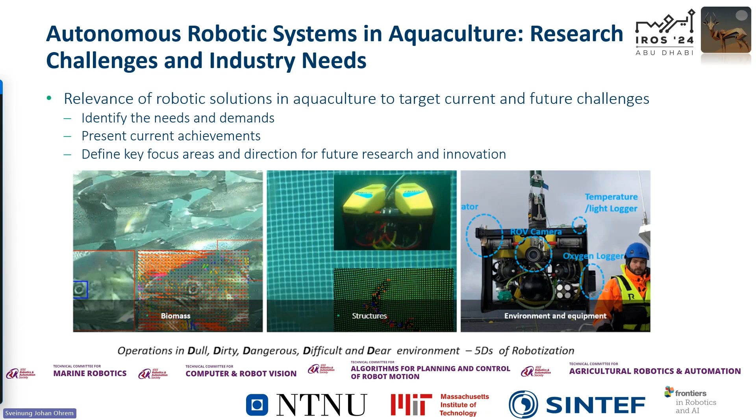Welcome everybody, we are organizing at IROS the first aquaculture-dedicated robotics workshop. The goal of this workshop is to bring together industry and academia, understand the challenges the industry is facing, see what kind of solutions we have so far, and then inspire the community to bring new solutions.

We have a big program. It's only a few hours, but intensive. So two sessions, two panel discussions. We have several spotlight presentations. And at the end, we will hopefully discuss the remarks of this workshop. The invited speakers in the first session are four people, and they will give the industry perspective and the challenges from the authorities in general.

In the second session, we have people working in research who have developed solutions in aquaculture. Two sessions, each with spotlight presentations and dedicated poster sessions during the breaks, discussing relevant results in aquaculture. In the panel discussion, all invited speakers will take part; we will not have questions during each invited presentation, but we will have all the questions during the panel discussion.

This is the organizing committee, and I would like to welcome you all on behalf of the organizing committee. We have support from four technical committees for this workshop, there will be three awards, as we will see later, and we have also launched a special issue in Frontiers in Robotics and AI.

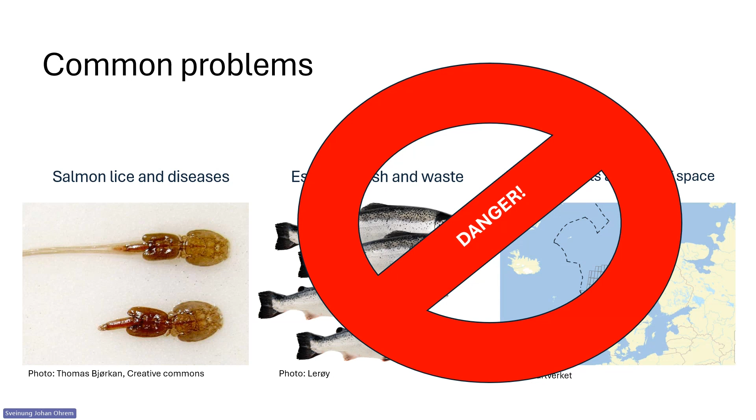In addition, I would say, or I hope, that some of the motivation for the technology development is that it's a very dangerous occupation. It's actually the second most dangerous occupation in Norway. So some of the technology development perhaps is to create a safer working place.

But other safety challenges could have easily been taken away if we had more creative organizations. Because we have the safety challenges coming with that we often need to perform operations hastily and with few people, perhaps having long hours and few breaks, leading to injuries and strains in manual operations and in stressful work that actually didn't have to be that stressful. So that will perhaps also be one reason to make more technology or automatize the operations.

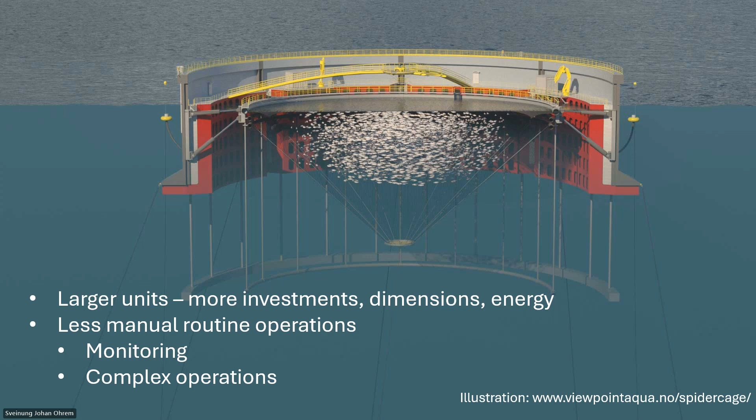So when we have been talking with people working at these kinds of concepts, in some of the ones that are up and running, or developing the ones that haven't been started yet, we can see that some of the challenges will be related both to what we call in safety research the sharp end, in the operations, but also in the offices. So you will have less manual routine operations, which increases the monitoring operations and also gives more complex operations out on the net pen construction. I will say a little bit more about that.

So the concepts do give more predictable daily tasks in control rooms. This is not directly dangerous, but it's still challenging for the health of the personnel. It's monotonous, staring at screens 24/7. It also requires experts in both fish biology and farming and practical things. And I'm not sure if those experts will want to have a control room working place. So it's challenging both ergonomically and psychosocially. Also, that could lead to strains, and it could lead to difficulties with recruitment.

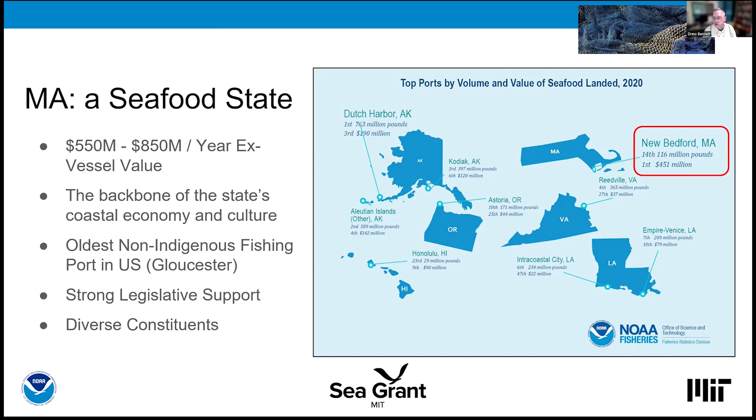For monitoring, we have an autonomous sailboat program. We have an autonomous profiler, which I will talk to you about in just a moment. We also look at other issues like eelgrass aquaculture co-location, which is legislated in the state. And we have a project in disaster preparedness for oil spills in aquaculture. What happens in the event of a calamity? What do we do to protect the aquaculture industry?

All of this is driven by our strategic plan. The National Sea Grant Program has strategic goals they want met, and our plan is designed to achieve those goals. In particular, in this case, number 3, developing technologies that will be transferred to the coastal resource industries so they can employ technologies and reinforce strategies to ensure safe and sustainable seafood and products. So the whole point is to get this out there in the hands of our communities of stakeholders.

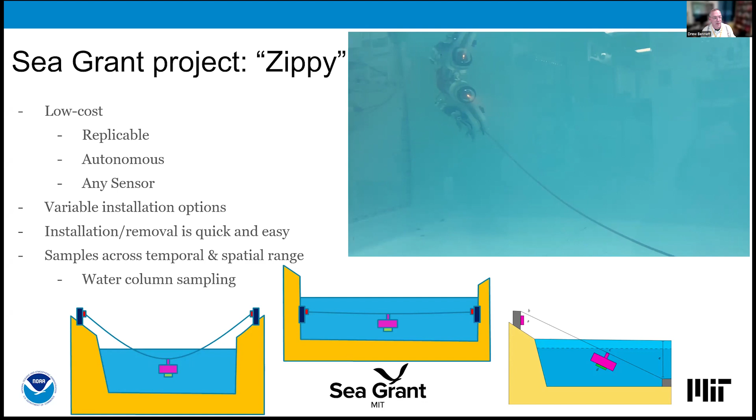You can have it mounted as originally intended with one end in the ocean and one end on shore. And now Zippy runs in and out regardless of the tide, regardless of the waves, regardless of the weather, and will collect data for you. So lots of installation options. Installation and removal is quick and easy. There are some fasteners on the side. You can clamp it to the cable and turn it loose. And it will happily collect anything you want to know about the water column.

So what are we going to do now? Zippy proved out that it can work, but it had a few issues. So we built a new Zippy. This time, instead of using polymer, we used all stainless steel and aluminum. It is much tougher. The clamping force on the cable is much greater. We don't have slip issues like we did before. We can carry a significantly larger load, so we can now carry multiple sampling bottles if necessary.

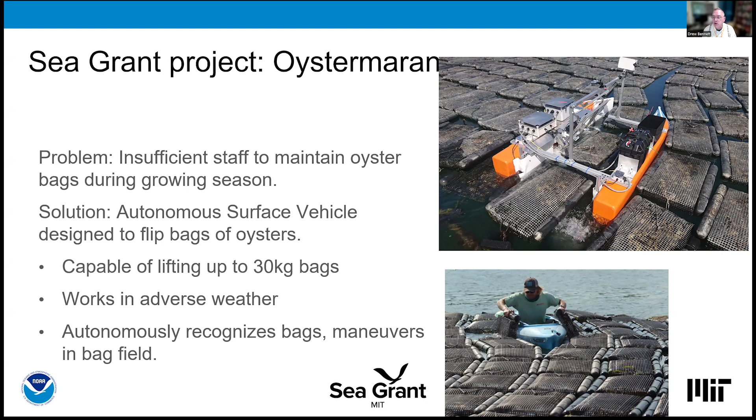Also, you have to do it in all weather, which tends to not be great fun for the aquafarm employees. So we built Oystermaran. Oystermaran's job is to flip the baskets autonomously. We have it autonomously recognizing bags, recognizing fields of bags, and maneuvering into the bag field to flip the bags. So we've now worked on to Gen 2. Our Gen 1 robot was a great learning lesson. We gave it some thrusters, we gave it a flipping mechanism.

Some of the things we discovered was the baskets, when they're being forced by tidal flow, press together, they press against the boat. So we needed to give the boat the ability to wiggle itself free, to struggle, if you will, and get free of the baskets. So we gave it additional thrusters in the bow. We also improved the autonomous basket recognition. Early on, we were using fiducials. Now we don't need that. We'll just know a basket when we see one.

And we've changed out the flipping mechanism. The first one worked okay, but it didn't shake the basket. After you flip the basket, the oysters tend to all roll to one side. So you've got to actually give it a bit of a shake to level out the oysters, which is better for the oysters for their growth rate.

Besides adding the lateral thrusters originally to wiggle the boat, we discovered that the thrusters also work really well to kind of push the baskets apart to ease the maneuvering. So we were kind of happy about that. And in general, it's working really well. And you see our latest generation in the bottom right. This was an early field test, and we're going out for an extended deployment this fall.

And that's all I've got right now. We're working on other projects involving upwellers and similar systems. More autonomy in the oyster seed industry, but we don't really have a lot to show yet, so I hope to have more for you another time.

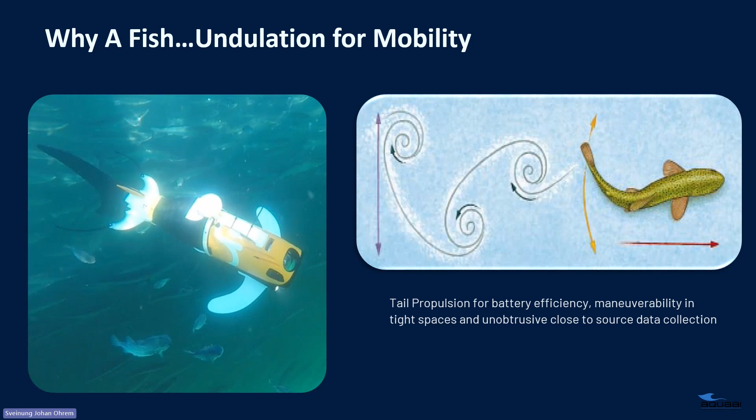Just to get back a little bit more onto the technology, because it is IROS, right? The vehicle carries a payload of up to 16 different sensors. The usual payload in aquaculture is salinity, dissolved oxygen, temperature, depth, pH, of course. But we also have the option to put other systems; it's plug and play, built modular like Lego. It has 3 cameras on board, including a belly cam, and a side scanner to do net inspections. And the other beautiful thing about having a biomimetic autonomous system in aquaculture is that you can go to different depths. So let's say you need a reading at 3 or 6 or 9 meters.

You can go to all those depths and you don't have to take your static camera up and down or sensors up and down. The robot just goes up and down on its own and it relays the information. In terms of the battery power, ideally you can swim up to 8 hours. You recharge usually every 4 to keep going. And again, it inductive charges, stays in the water up to, we had the ones in Norway were there about 10 months at a time and we took them out and we can go longer.

So even now, when we talk about the technology, obviously different waters here, it's much more salinity. So it probably won't last a whole year in the waters here. But the idea is to really make an ease of use system that stays in the water and does the job of monitoring 24/7.

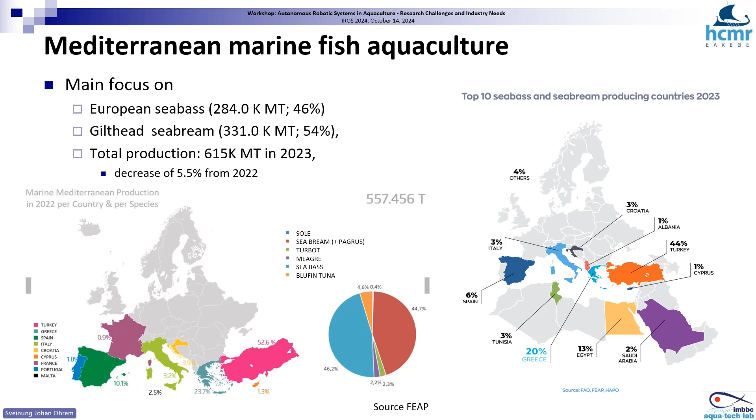And if we dig a little bit more into the data, then we see that there are more countries involved, and not only more countries, but also more species. So if we want to have an overview of the characteristics of the sector, we can say that the Mediterranean sector is characterized by species variety, which makes a huge difference from Norway or Chile. And these species have different feeding requirements, different behaviors, different tolerance limits to temperature, different disease resistance, and so many other differences that make the situation a lot more complicated.

But the majority of the species are found in sea cages, the major ones at least: the bass, the bream, the meagre, the pagrus. And also in the Mediterranean, we have tuna farming, which is a completely different story, and I'm not going to refer to it at all because it's a different farming operation from the beginning to the end.

And in the sea cages, most of the husbandry relies heavily on manual labor. And in the Mediterranean, we have small farms, and this is a clear indication of the fragmentation of the sector. And also we have a very varying regulatory framework, in the sense that we have at least 12 countries involved, 3 of them outside the European Union. Therefore, it's quite difficult to employ universally applied methods. We cannot transfer directly what's happening in other parts of the world. And it's very hard to create one-species-fits-all algorithms.

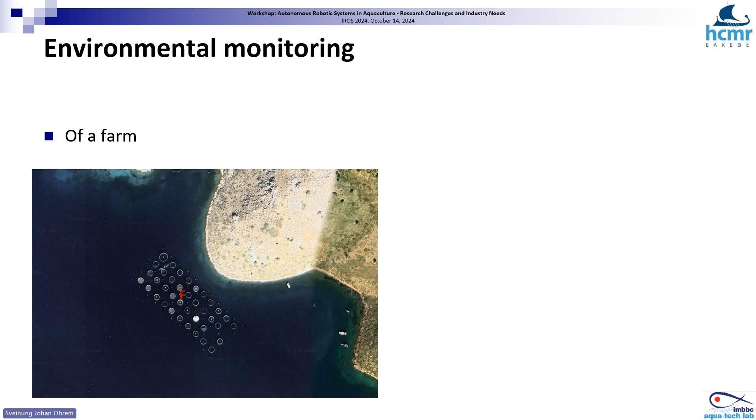But it's getting more and more important to monitor several farms, wider areas. Here, for example, in this picture that I'm showing you, there are 7 farms co-located in quite a close area. So we need to understand the interactions and how the environment is affecting not only one farm, but all around. And for this, we need a different approach: not only sensors, but different types of data, like satellite images.

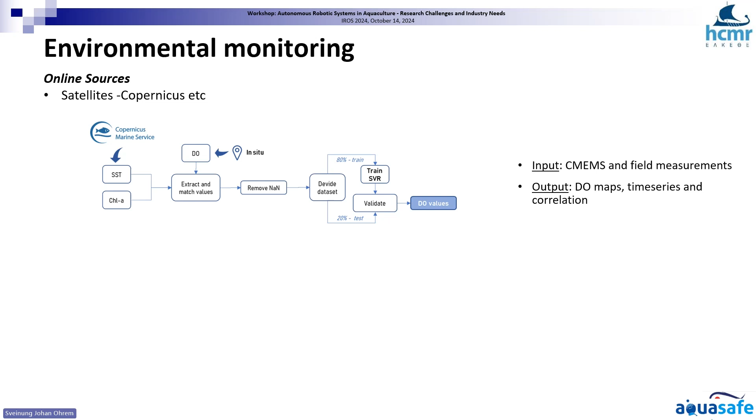And in the European Union, we have the Copernicus system, which gives us this possibility. They provide us with data that allow us to monitor wider areas. And in this example that I'm showing you here, we have the information for the temperature and the chlorophyll, which is the presence of phytoplankton, nanoparticles in the water. And then with an algorithm, we have been able to estimate the oxygen concentration in wider areas, and this gives us the chance to have a better overview of what's going on in a wider farm.

Of course, there is a web-based platform always there, where we collect the data, and with the help of biological models that provide us with information about the requirements of the species in the future, in 1 week, let's say, for the oxygen demand, for example, we are able to monitor better the farm and also to apply improved husbandry practices, and the farmers can really manage their farm in a better way.

Feeding control. Why is this important? We all know feed represents one of the biggest parts of the operational cost in the farm. We know that it's a multi-parametric problem. It depends on the environment, the physiology of the species, and also the behavior. And this is where we have been concentrating recently, wanting to answer some questions like how fish behave during feeding, and if we can understand when the fish are satiated, when we can stop feeding, how we can control feeding in a better way.

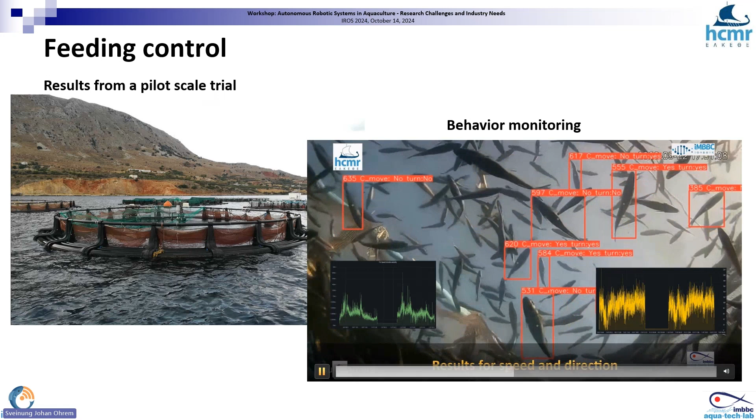So we use cameras, static cameras, but we hope that we are going to use something different in the future. And we have a pilot farm where we are able to do trials, and you see how the fish behave. We are able to track and detect the fish and take some information about their speed and their direction. And also we are able to monitor the specific activities that the fish have during feeding. And you see that the sea bass, for example, has this strange, high dense activity when they are fed, which is completely different than with other species. So we have to develop similar algorithms for all the species that we are interested in.

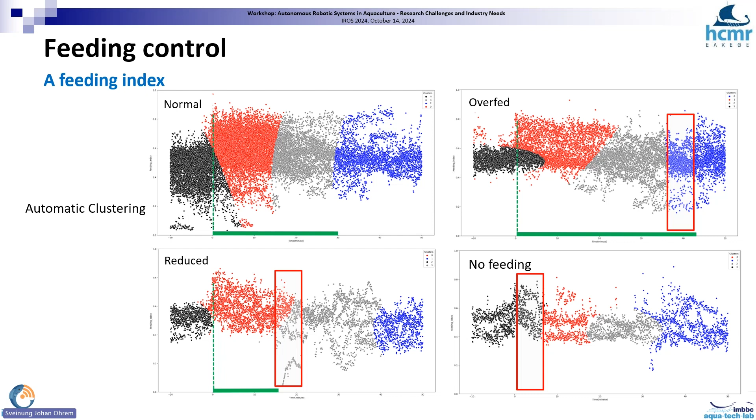And I invite you to check also the poster session when my colleague Dimitra Georgopoulou will make a presentation on this. And there is also a poster where we can discuss in more detail how this came up.

Now, apart from feeding, of particular interest is the monitoring of the fish in terms of their size and also their welfare. And there are some operational welfare indicators that have been defined based on external characteristics of the fish. So we use, in this particular case, a stereoscopic camera, where we define several morphometric characters on the fish. And then we are able to see not only the size of the individuals, but also the presence or not of external changes in their body, like color changes, lesions, fin erosions, and so on. And we have a quite good idea of the actual situation of our stock.

Finally, I'm going to speak a little bit about cage net inspection, something that we are going to hear much more about later on. I don't need to say that this is a manual operation now, and why it is important to have an autonomous vehicle to do this operation.

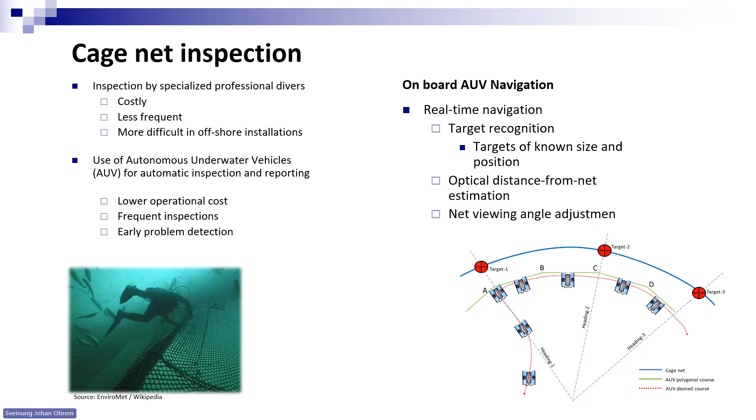So, some years ago, we have been working in this direction and trying to have real-time navigation with target recognition. We used a small robot, and you see how we have been testing it in our cages with several thousand individuals of bream, and we successfully made the robot complete the navigation and monitor the fish while having on board also particular algorithms that were able to monitor the integrity of the net and whether or not there are holes or other disturbances in there.

Speaking about cage net inspection, I would like to mention two more much more recent projects. One is the Kalypso autonomous underwater vehicle that came from a Greek group from the University of Aegean that have developed from scratch a new AUV, and they have also attached an arm on it in order to make some manipulation. And also the HEKTOR project that we are going to hear much more about later today in the next session, that came from the Croatian group.

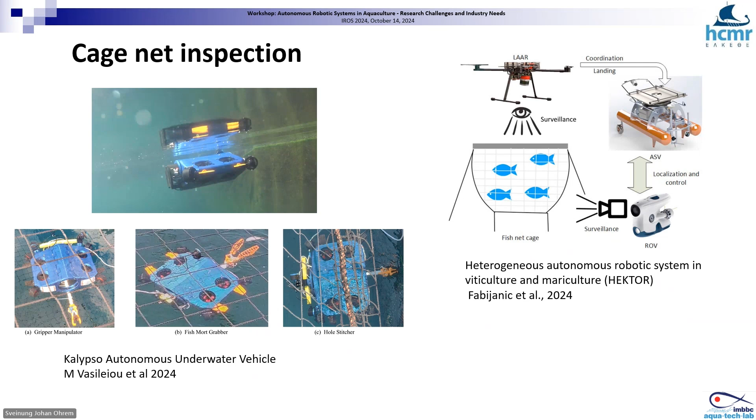And to close this summary of what's going on in the Mediterranean, I'm going to show you some of the future challenges of the sector. I'm going to start with climate change because this is of particular importance, because it affects all the production chain of the industry: the fish, the infrastructure, the personnel, everybody. So we have to focus on this. We need to find new farming areas, and the sector should decide whether or not they're going to move a little bit offshore or invest in RAS.

And it's obvious that we have to take care of the sustainability of the sector in terms of environmental, social and economic sustainability. If I have to give some lines of where to look, I would say that we need data of various forms to perform predictive modeling and to develop digital tools that are very important and essential for the sector. To apply the principles of precision fish farming, because this is going to absolutely transform the farming operation, not only in terms of improved decision making, but also operational efficiency.

And if I'm allowed to provide some requirements from the sector, I would say that the use of autonomous vehicles for inspection and repairing of the nets is of particular importance. Also, before closing, I would like to give some attention to skills and capacity building, because it's important how this technology will pass to the sector, and we need to acquire knowledge with new approaches, with a multidisciplinary and transdisciplinary approach, and with novel mechanisms.

Okay, the preamble for this research is to help the ROVs in better detecting the defects in aquaculture net pens. The idea is the aquaculture net pens have different defects such as holes or debris, which can lead to loss of fish and loss of fortune. For that, previously we used to have divers who used to go there. Nowadays, because of increased safety and efficiency, we introduce ROVs over there. So the ROVs go there and detect different defects in the net using computer vision algorithms.

So our idea is to add a layer of autonomy to this detection process by introducing a gradient estimation, which would help the robot to adjust its position with respect to the net. So this is the architecture, the main idea of our research. So going from left to right, this is the net pen. The image is acquired by the ROV, and this gradient estimator is at the heart of our research.

The gradient estimator first extracts the gradient of the net from the image. It then matches this using a pre-trained model, which has been trained with images that are good distance, close distance, or far distance. Based on that, the gradient estimator tells the controller on the ROV that either you are near, far, or at a good distance from the net. So based on that, the controller commands the ROV to either move close or far from the net.

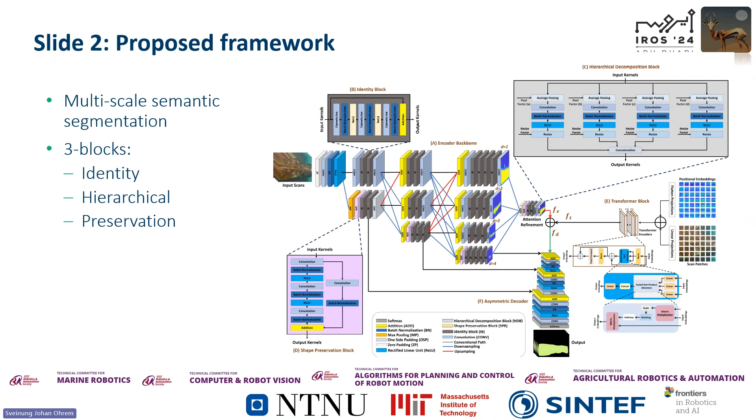So the proposed model, this is the architecture diagram of the proposed model, and it contains different layers, and these layers are identity, hierarchical, and preservations. So each layer performs their distinct activities, taking the input images and extracting the features based on the annotations of different classes.

So our results show some significant improvement over the current traditional computer vision models. And we have published this work in some reputed journals.

Hello, my name is Dimitris Voskakis, and I'm a research fellow at the Norwegian University of Science and Technology. As is well established, aquaculture plays a significant role on the global economic scale. It has experienced significant technology developments in fish biology and the production environment, and several novel studies aim to improve aquaculture practices and fish welfare.

Our objective with this project is to use a non-invasive system to assess stress response in salmon, to provide and enable a warning system that informs us about the state of the fish. Hence, we created a novel tank environment that can mimic the light conditions that exist on site. We implemented novel technologies there. And in a sentence, we can say that we are using the fish as sensors.

So as you can see here, we have developed an enhanced tank environment where we have used a submersible LED light that can homogeneously illuminate the tank, where the light scale is similar to daylight. We can adjust this light support frame to the desired depth, so we can illuminate the whole tank in a homogeneous way.

Also, we have installed a camouflage frame where all the instruments, the sensors, the water inlets and outlets are, let's say, hidden behind this camouflage wall. So we have a clean arena for the fish. And through that, we avoid fish collision and the potential impact of the presence of these external factors.

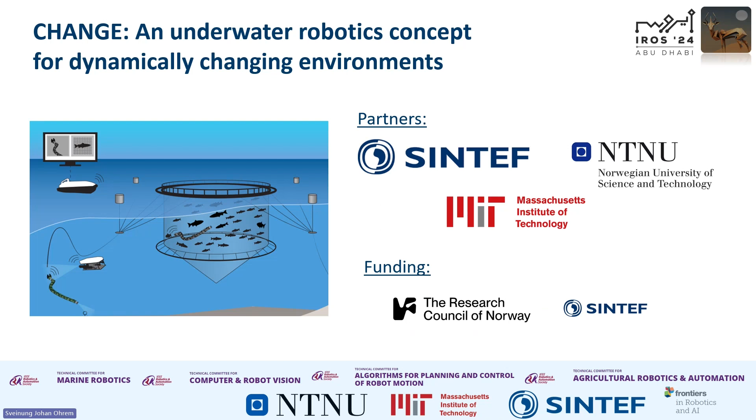So by now, we've heard many of the other presenters talk about how the aquaculture industry, especially in Norway, can be very challenging. It can be dangerous for the people involved because of weather conditions. And there's also a need to make it safer for the fish. And to do that, we can, of course, use technology. We can use robots. There are many solutions that already are here. We don't know enough about how this technology actually impacts the fish.

So we tried to do some experiments where we took a mid-size ROV and deployed it with sonars and a stereo camera. And then we did some movement tests that were very typical for both inspection and intervention operations. Put the thrusters on and off in high and low intensity, did some movements, and also did some turning movements to simulate an inspection.

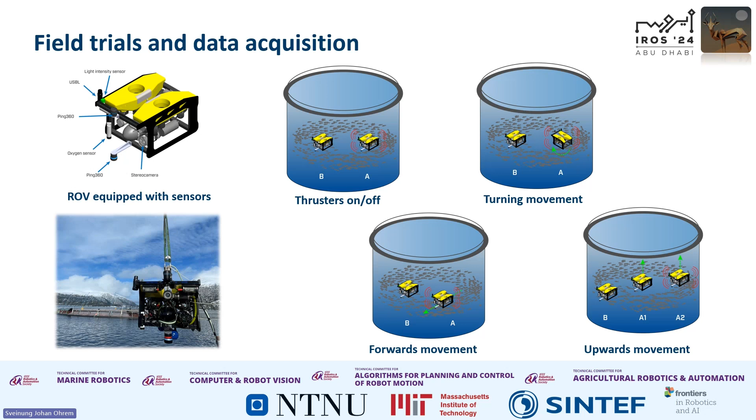And we use the same stereo vision video to do a qualitative blind study where a series of reviewers watch these 5-second random videos of fish and try to score the level of escape response. What we saw was that there were several cases where we got a strong reaction from the fish, especially during fast movements or high effect of the thrusters. And what we saw was that these 3 methods for analyzing the fish response to this technology gave similar results.

And what we know now is that we should use these methods to do further trials to have an even larger data set to say something about how fish react to the robot. Thank you.

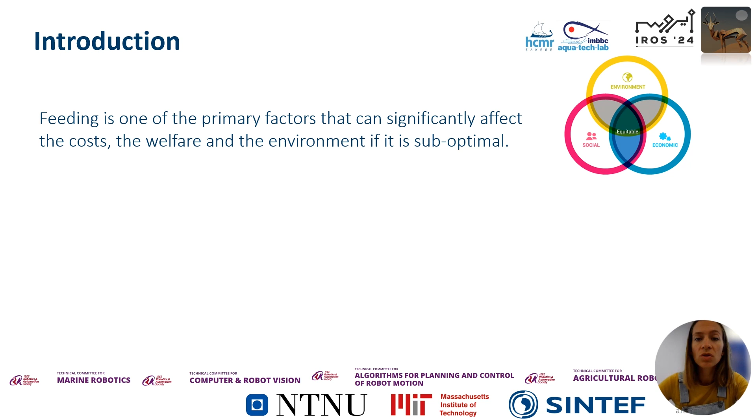Hello, I'm Dimitra Georgopoulou, and today I will present to you a tool we have developed for monitoring the fish behavior in marine cages. In aquaculture, feeding is one of the primary factors that can significantly affect the farm costs, the fish welfare, and the surrounding environment. For this reason, it is very important to prioritize and optimize feeding. We know from research that the satiation levels are tightly linked to specific behavioral responses in fish, and therefore we can optimize feeding by monitoring the behavior of the fish.

Here we had a double aim. First, to develop a tool that can constantly monitor the behavior of the fish in marine cages, and second, we wanted to identify indicators for detecting satiation levels in European seabass. For this, we planned an experiment where we fed the fish with different quantities, and during this period we were monitoring the changes in behavior using the submerged camera in our pilot scale farm.

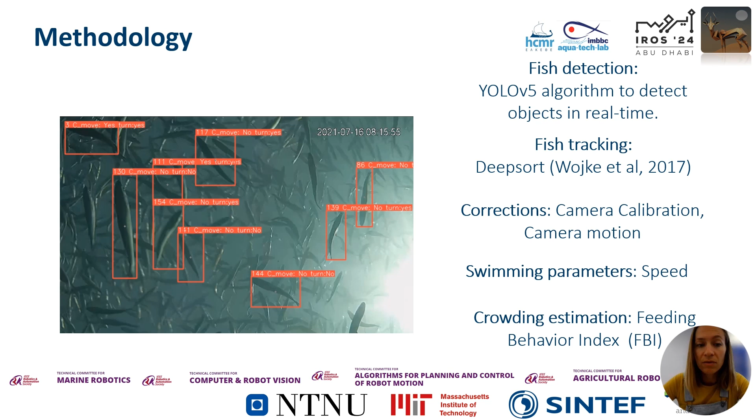We used well-developed tools such as YOLO and DeepSort for detecting and tracking the fish. We corrected the camera for camera distortions, and because we were in a very mobile environment in the sea, we corrected for camera motion. From there, we extracted one of the behavioral parameters tested, the speed, but also using other computer vision techniques, we extracted the feeding behavior index that can show us the crowding level of the group. From the analysis, I will present two basic results, one for each parameter.

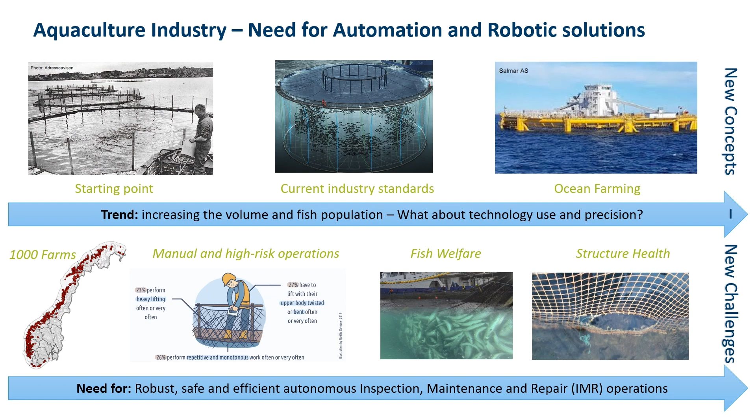Just the motivation: in Norway, the aquaculture industry is one of the biggest industries, and from the starting point in the 70s with these wooden structures towards the current industry standards with plastic floating structures, and the latest development licenses where new concepts have been developed and deployed, there has been increasing interest and increasing volume and fish population, but this has not been the same for adopting new technologies. Only in Norway, there are now about 1,000 farms around the coastline, and several of the operations are done manually, and there are risks associated with the personnel working in these facilities, fish welfare, preservation, and structural health. This indicates that there is a need for robust, safe, and efficient autonomous inspection, maintenance, and repair operations.

Currently, the practice in the majority of cases is that several service vessels with cranes and people on board perform several operations in fish farms on a daily basis. But there are several fundamental challenges to growth related to fish welfare, mortality, escapees, sea lice, and working conditions, and the industry needs new solutions. Therefore, the Norwegian government lately has asked the fish farmers to propose new solutions in order to target some of these challenges, as mentioned earlier by Christina.

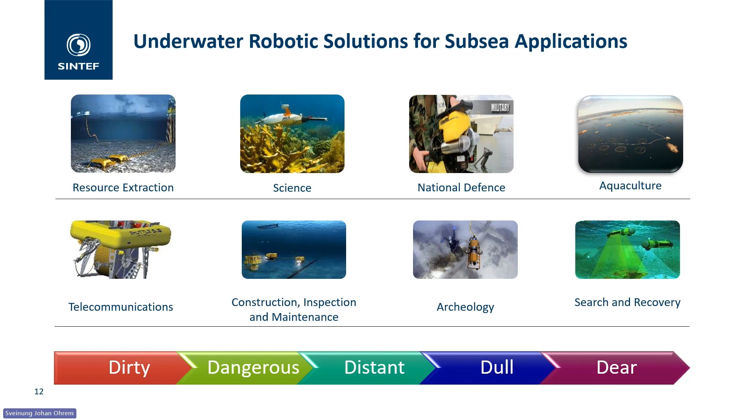But we know that new concepts might bring new challenges, right? And innovations might bring new risks. As researchers, we really need to develop solutions that are robust, safe, and efficient when we are adapting robotic systems. In our group in SINTEF, we use underwater robots, study them and develop them for use in aquaculture. And we're not the only ones using robotic systems. They have been used in many industries, with oil and gas being a dominant industry using them. And the question that we always face is: why don't you use these robots? Why do you need a new one, and what is the problem?

Robotic systems in aquaculture face completely different conditions because they operate in the wave zone. They are no longer on the seabed, where you would see robotic systems in oil and gas, for instance. They are dealing with flexible structures, not rigid structures like pipelines. And the biggest difference, as we saw in several presentations earlier, is that there is a biology component that we cannot forget, because all these robots need to operate inside the cages, which have up to 200,000 fish. So we really need aquaculture-dedicated solutions if we are going to develop technologies for this industry. Therefore, we thought it was very important to establish the first aquaculture-dedicated robotic systems lab, which will work both on basic research and on innovative solutions towards making such systems sustainable for aquaculture.

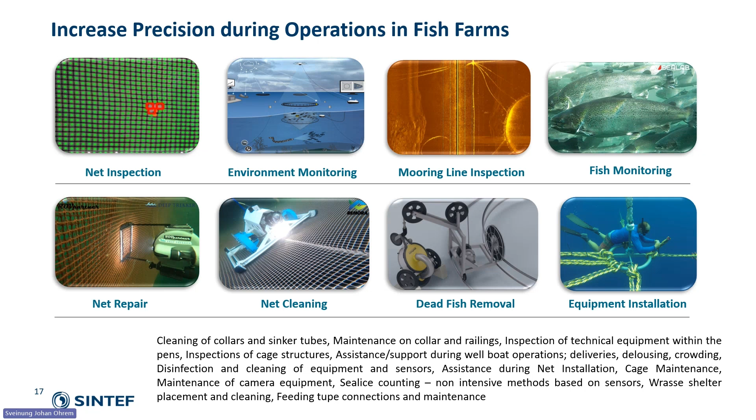But why and how? We needed to start from the beginning and see which operations are relevant for utilizing robotic systems. And there is an enormous list. We're starting now with the most important, like inspection of the nets, monitoring of the structures, of the environment, of the fish, and also some types of intervention and repair, like cleaning the nets. In the group, the main goal is to do this autonomously, because we have seen manual operations happening. But to make them autonomous, we really need to develop novel methods, motion planning concepts, perception, communication, localization, all these parts that are the same in all marine domains. But aquaculture brings the extra challenges we talked about earlier that we need to incorporate in the solutions we're going to develop.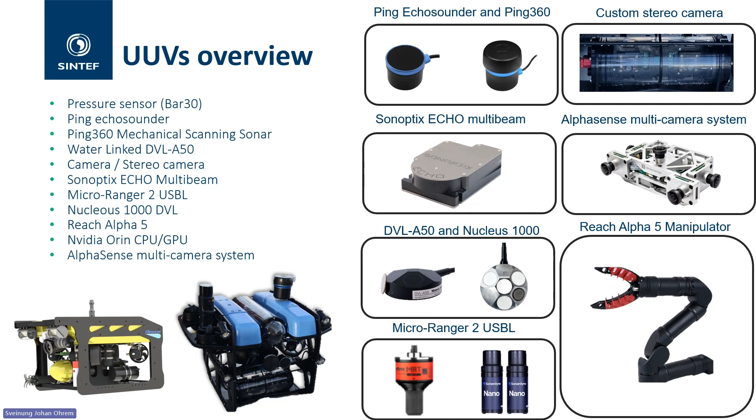So we see that we can do this. I'm sorry, there is something on the slide. So we can see that there is a need for a lot of sensors and a lot of robots, and there are some in the marine industry, but we are trying to integrate all of them in aquaculture and see how they can operate.

So we need the multimodality of the sensors to localize these systems in order to target the autonomy. So we can build different versions of them and check which ones are the best to use. But to test them, we need an environment that's realistic. And we have the pleasure to operate our own facilities with 4 fish farms in Norway, where we can deploy all these systems and test.

As mentioned earlier in the panel discussions, while testing in the real environment of the industry, they also realize what concept can be suited and which ones we should adapt, and we learn from them. So it's very nice to have there, but I want to show you that it's not like nothing happened when it comes to robotics in aquaculture. There are a lot of solutions there, and we have several projects, both working together with the industry, but also very disruptive research when it comes to addressing some of the challenges.

So I'll go in my presentation through 3 different concepts where I will show how robots can be used to monitor first the environment, because they're interested to know the temperature, oxygen, and all this on the farms where they're operating and growing their fish. They need to know if they have a hole, biofouling, and how the robotic system has been demonstrated for such inspection operations. And also, what is the status of the biomass, because this is their profit. So how can we utilize robots to do that?

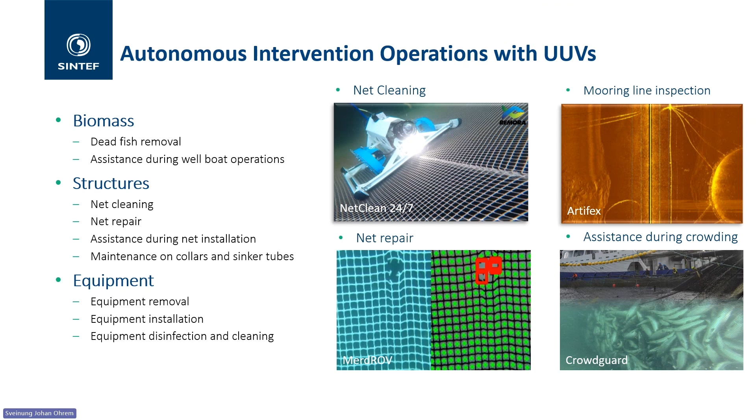Intervention is kind of a pain, and we all know about it, right? And intervention in aquaculture with flexible structures and 200,000 fish moving around, it's even more pain. So limited work has been done when it comes to intervention, and we'll present some of the results now in Norway. So when it comes to inspection and monitoring operations using robotic systems, I want to show you this concept of the underwater vehicle that is utilized to do 24/7 inspection. And this is done in the fish farm that we have in SINTEF.

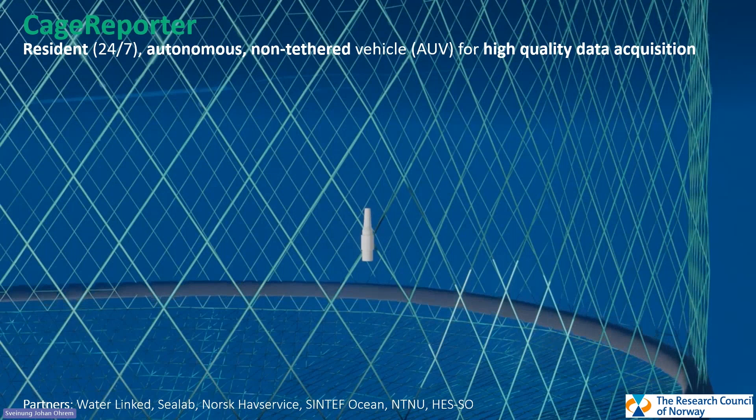So we went out there, and since localization is a challenge and we don't have GPS underwater, we have to deploy locators in order to get positions from the different points of the net, and then use numerical models in order to estimate the real-time structure deformation. And by knowing this information and also having an acoustic sensor locator on the ROV, we are also able to know the position of the vehicle. By knowing now the relative position, the vehicle will be able to autonomously operate 24/7 inside and start gathering high quality data that we can use to obtain information about the status of the environment, the fish and the structure.

So several sensors have been adapted, and we work very closely with the industries making both the sensors and the localization system, but also the fish farmers. So these are the type of data we collected, where we can get videos of the net, and then we can apply a simple FFT method in order to get the structure and the distance of the robot from the structure. And then we can see how good the quality of the images is. We also can use this to identify the holes on the net.

If we're able to gather all this information, this is how it can work. And we have the flexibility, since we're operating this, to go there and hang empty cage nets with holes. We don't want to have escapees, but we need to test this algorithm during this operation. When it comes to fish, if you are constantly recording, then you are able to use computer vision methods to identify them individually, count them, detect them, monitor their behavior, and also track them. If you are able to track them all the time, knowing their velocity, orientation, and distance from the robot, as Lynn showed, you can say something about their behavior change.

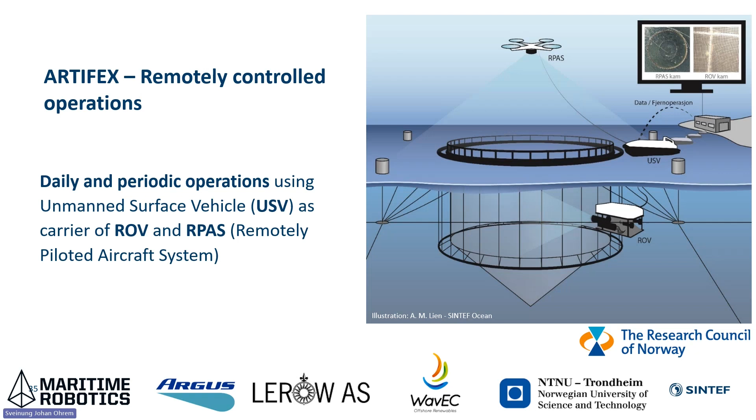There are projects where we have multiple vehicles: you have the USV, you have a flying robot that goes and gets the safe areas, and then deploys the ROV in order to do inspections of the nets, inside and outside.

So here we see fully autonomous net-relative navigation by using DVL. Using the beams of this DVL, you can estimate the relative distance and the orientation. And this is something that has attracted the industry's attention, to avoid needing really experienced operators doing this in fish farms. This is when it comes to monitoring and inspection.

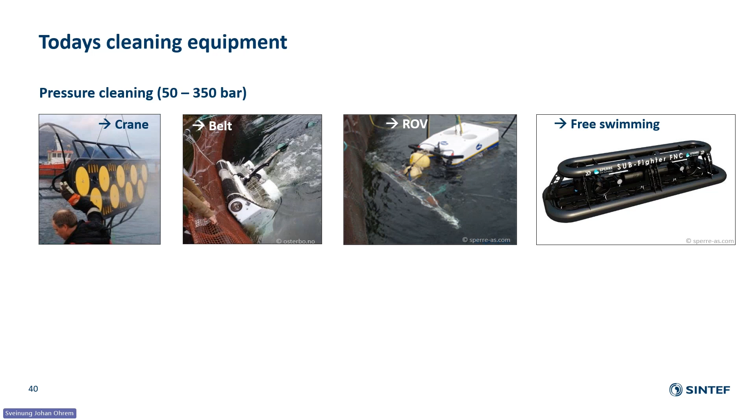When it comes to intervention, net cleaning has lately been done in Norway mainly with robots, but they're still using service companies with experienced operators, and this is how they're doing it. So there are different methods to deal with biofouling, and there are already many products, but maybe they are not affordable, as Liana mentioned earlier, for every country. But in Norway, there are all these concepts that they're utilizing.

And the last one that has been developed is these 24/7 permanent resident vehicles that we are deploying. But to target the autonomy of this, for instance crawling robots that constantly disturb the surface of the net so the biofouling doesn't grow, you need to make them do this fully autonomously. But how do you solve the docking of this system in flexible structures? How do you have the communication and all this? These are the components that we have targeted in our projects, and these are now products that the industry is testing in their facilities in Norway.

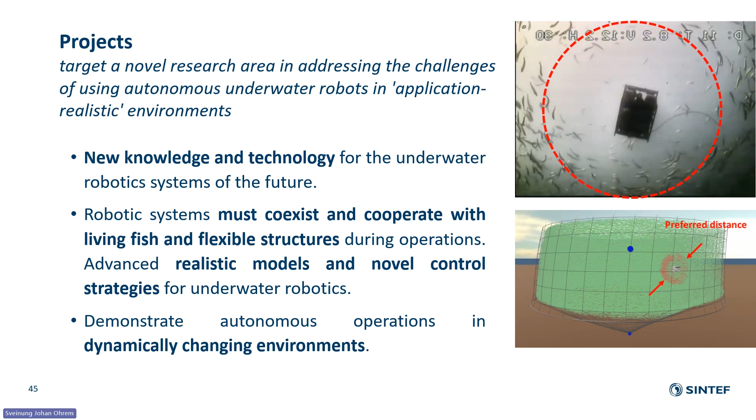So my conclusion here is that even though we have tested several robots, we still need aquaculture-dedicated solutions. And we see that it's very important that these robots, technologies, tools, anything we put there, should coexist with the fish when they are operating in the fish farms.

And what we did is we went back and said, we want to know how the fish feels. How does the sound affect their behavior? Is the color affecting their behavior? Is the size? What are the components? So we deployed a lot of sensors on the robot. We gather the data, we analyze it, and then we can quantify the change of the behavior. And this can be really important information to the people producing these robotic systems.

But what should be the criteria for developing systems for this industry? When it comes to autonomous navigation, we need collision-free operation. So this demonstrates a concept in our fish farm where the ROV Argus, the big one, is moving, trying to collect data, and then suddenly another one enters its path. It autonomously adapts its motion, avoids it, and when there is no more obstacle, it continues the operation.

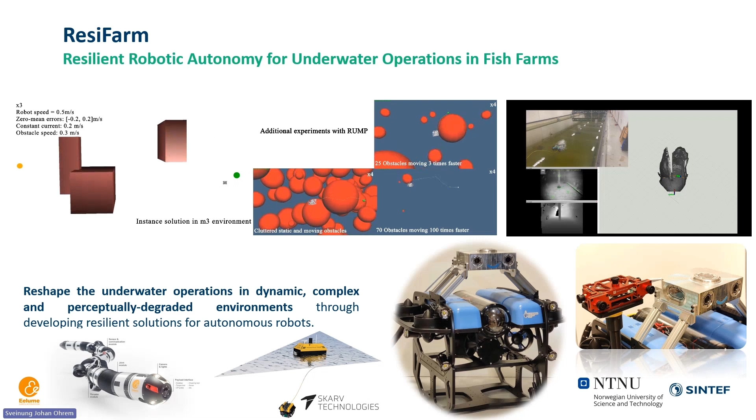I will move on to the last part due to time constraints. What we need is resilient autonomy. We partnered with NTNU and several companies developing robotic systems in order to increase the resilience of robotic systems in aquaculture. To do that, we have collected a lot of data from the fish farm, which we're going to release in a few days: all the fish recordings from stereo and single cameras, recordings from sensors like acoustic sensors and echo sounders, anything we have collected, so the community can use all this data and study which solutions we should have in aquaculture.

The next step the group is targeting is actually remote operations, because everything is moving to exposed and semi-exposed areas, and we can't go there. So we really need to move towards remote operation. We have our control room in Trondheim, we are sending the signal there, and we're demonstrating with all these models we have and the live streaming of the signals to demonstrate remote operations.

To conclude, I believe that aquaculture needs solutions to target its challenges, and robotic systems can be very relevant to target several of them, and can be used for inspection, monitoring, repair, anything you can imagine. But having them do this autonomously still involves open questions, and it's very relevant for the research community, and especially the marine community, to merge together and start targeting these challenges with motion planning, launch and recovery, docking stations, intervention tools dedicated to the different domains, and all this stuff.

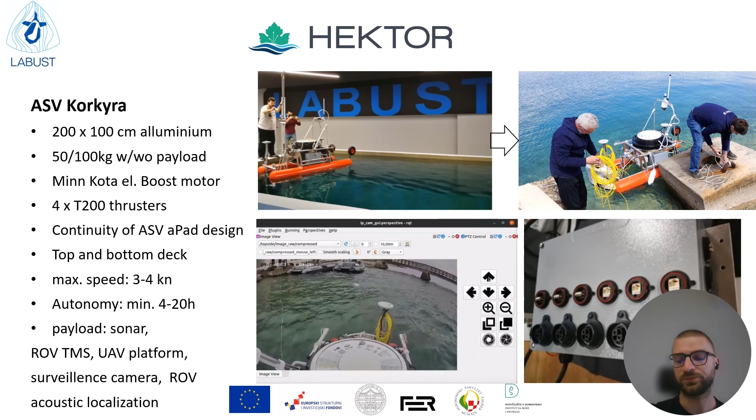It's a continuity of design from our previously developed ASV named aPad in our lab. And as I mentioned, the payloads can be quite a various set of sensors and subsystems. To name a few, a tether management system for the ROV, a landing platform for the flying drones, surveillance cameras, LiDARs, the acoustic localization system for the ROV, also a multi-beam sonar, so it's quite an expandable system.

The ROV that we integrated with the autonomous surface vehicle was the Blueye Pro ROV from the Norwegian company Blueye. I'm sure many of you have heard of it.

It's a 300-meter depth rated ROV with 2 hours of autonomy, which were quite enough for our application. It has a full HD camera with a tilt angle control, also the lights, and internal IMU, temperature and pressure sensor, giving it quite precise depth measurement.

So the flying drone was developed in the LARICS laboratory from our faculty. It's a medium-scale carbon fiber quadcopter that has an autonomy of around 30 minutes flight time, having in mind that its payloads are the Velodyne LiDAR sensor, Sony RGBD camera, also multispectral and thermal cameras.

So the first step in our project that started in March 2020 was to first procure the ROV and start developing the ASV, but also making this driver or the interface for the Blueye Pro SDK in ROS2. That was the first step of our lab towards doing things in ROS2 to future-proof our software, so to speak. So we can see all the ROS nodes included in this package on the right, and also the graphical user interface that we developed, trying to mimic the graphical user interface in the mobile app of Blueye.

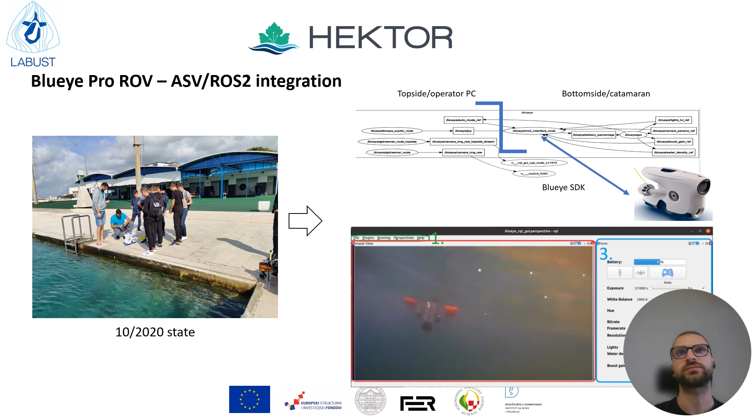So another system that we needed was the acoustical system for underwater localization of the ROV and its relative position with respect to the ASV, not only for enabling precise control of the ROV with respect to the catamaran, also with respect to the fish cage, but also the control of the tether management system, giving the tether slack to the ROV. So we opted for the Water Linked Underwater GPS G2 system, since it was, to be honest, the most affordable one, which proved to be quite precise.

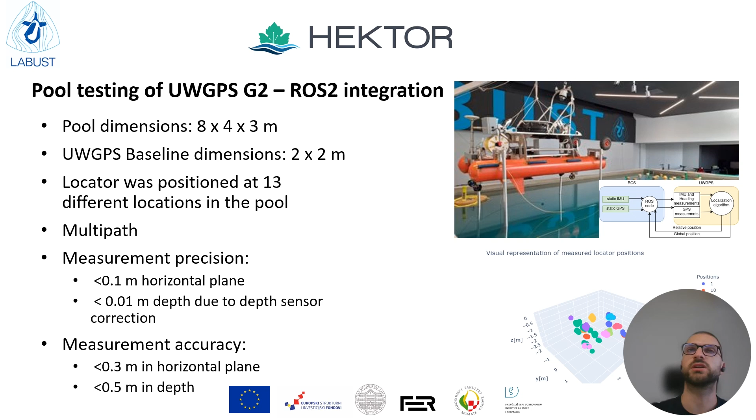So here we see just a short overview of pool results, which are quite challenging in our relatively small 8 by 4 by 3 meters depth pool in our lab in Zagreb. But we also see that the accuracy is better than half a meter with respect to the ground truth, basically. So for our application, this was good enough, because we also had a camera on board the ROV that we could use to estimate the distance from the net based on the a priori known size of the openings of the net.

So another subsystem that enabled the cooperation between the ROV and the ASV Korkyra was the tether management system. This system was also completely developed in-house as a separate system that could be easily mounted in the front of the catamaran Korkyra, and also plugged its power cables and all USB and Ethernet communication in an extension box using waterproof connectors, the extension box that we also developed for ease of using many payloads that we tested with the catamaran Korkyra. So the total length of tether that we bought together with the Blueye Pro ROV was 400 meters, and it's quite a thin 4 millimeter diameter cable.

All in all, given the size of the drum of the TMS, it would be wound at most like 16 layers, and each layer having 59 windings. So for this, we used also a slip ring to send the communication from the box of the tether management system to continue the communication through the cable towards the ROV. We use the worm gear transmission as a brake, basically a mechanical brake, so that the drum wouldn't roll when the motor stops working. And we also tested it in the pool and at sea.

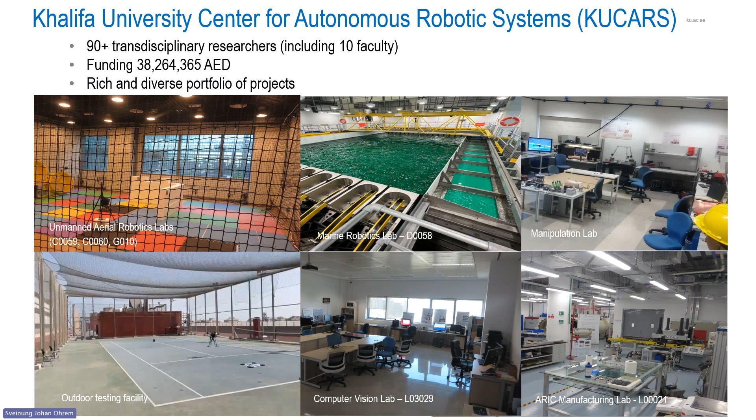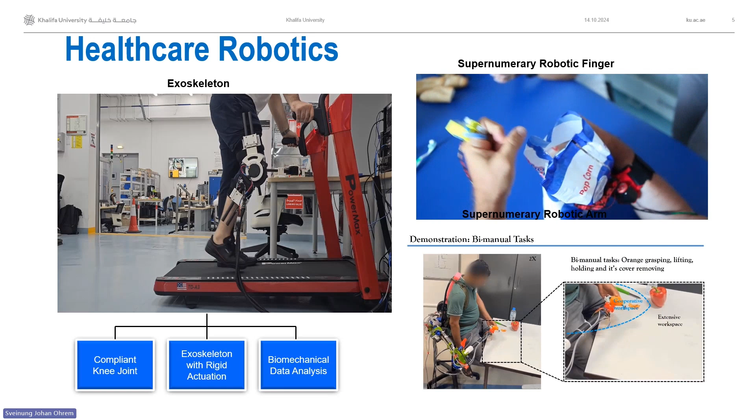So some of the projects that I am particularly working on are in healthcare robotics, where we are developing technology related to exoskeletons, for example, to provide assistance and rehabilitation for stroke patients. And the other devices that I have developed are what is called extra robotic limbs, supernumerary robotic limbs, that are useful for chronic stroke patients, both for the fingers and the arms.

And some of the other works that probably during your technical visits you will see are related to agriculture robotics. So we are in the process of building an autonomous greenhouse that will consist of multiple sensors, including thermal cameras, spectral cameras, and robotic systems to perform tasks related to, let's say, yield estimation, monitoring of the crops, disease identification, and so on.

And we also have some other activities, which you can see when you visit our booth or our labs. One of the projects that we have is related to animal conservation, where we are building a Houbara robot that will be used to interact with the natural Houbara to record their behaviors and also to interact with them in a seamless way. So we use our AI model to detect their behaviors and possibly generate those behaviors. So these are the projects that we are working on.

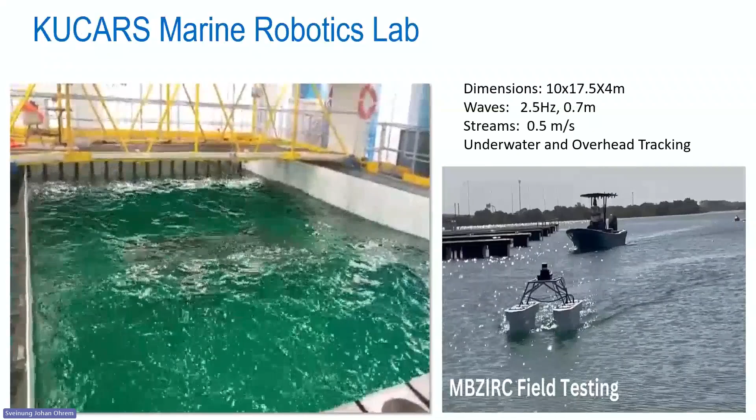Of course, there is much more to say, but I would like to come back to the topic of this workshop, which is marine robotics, in particular aquaculture. So in marine robotics, we have our marine pool with waves and streams. You can generate these waves, you can measure these waves. We will also have the tracking system, above water and underwater, to localize the robots. So this is the great facility that we are using to test some of our equipment.

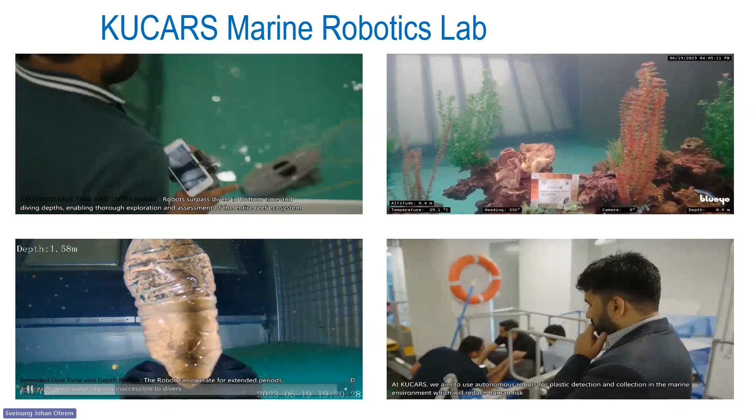We have multiple platforms that consist of ROVs and USVs, and we have a couple of funded projects related to coral reef inspection, aquaculture inspection, and also plastic ocean cleaning. So these are some of the activities that we are doing in our underwater pool.

We also started a collaboration with Stanford University, where Professor Oussama has developed Ocean One K, and particularly he's using the haptic interface to teleoperate this robot and also have the sense of touch as feedback. The robot can go to 1,000 meters deep, and you have tactile sensing through these haptic interfaces. And I think tomorrow he also has a talk, so he will be talking about some aspects of this.

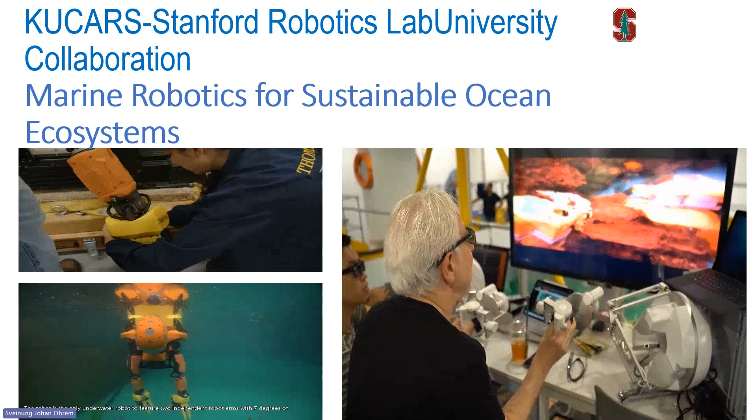We also participated in the MBZIRC competition. We had a joint lab with the Beijing Institute of Technology, where we got the third position in this competition. And again, this morning in the talk, I explained the different parts of that competition, which were related to localization, navigation, detection, and manipulation. So I will be going fast.

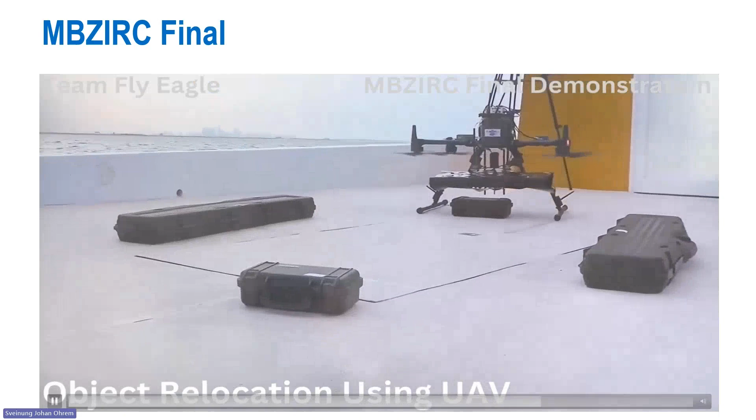So these were some of the assessment stages that we passed to go from the semi-final to the final stage, and these were some of the tests that we did during the actual competition. Of course, the competition was in GPS-denied environments, with heterogeneous systems that together need to perform the detection task, detecting the target, and then picking the objects and bringing them to our USV. So we also established a joint lab with BIT, where we are focusing on a project related to port security inspection.

And another project that we have is related to coral reef inspection. As you see, for the coral, at the moment human divers go inside the water. Of course, it's an extreme environment. It's not safe. You need a very expert diver to do this inspection, and the divers go with the Coral Watch, put it next to the coral, and then try to label the color changes and classify the corals. So what we want to do is use an ROV with the Coral Watch mounted, and repeat what the human divers used to do using our AI algorithms.

Another problem with the coral particularly is the starfish. So again, the human divers used to detect that starfish and used to inject the salt that helps to control the population of these starfishes. We have developed a solution to autonomously detect these starfishes, and then we have a tool that helps to perform the intervention task that the human is doing.

So these are kind of the experiments that we have done in our pool, where we simulate the whole exercise of autonomously detecting the starfish and then having this tool to inject the salt inside. So these are some related projects.

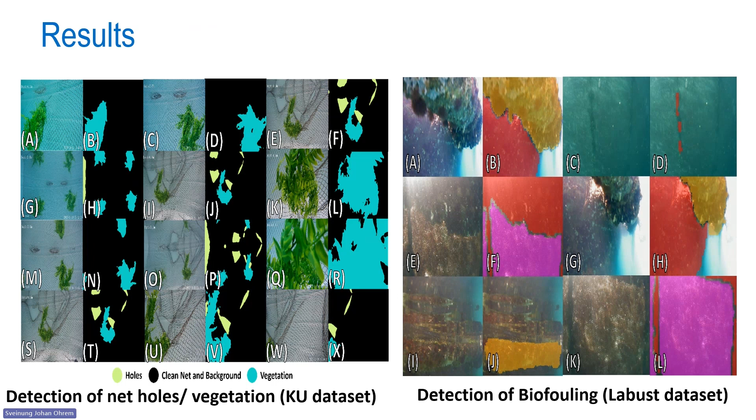So the proposed model consists of an identity block, a hierarchical block, and also the shape observation block. We then tested our proposed model on this dataset, and here you can see the qualitative evaluation of the proposed model on the KU dataset, where the first, third, and fifth columns show the original images, and then you can see the results of our algorithms in detecting the holes, the biofouling and classification. While on the right side, you can see the biofouling detection on the other dataset.

So clearly we saw that our proposed algorithms showed a better performance as compared to the traditional approaches. In our marine pool, we set up the experimental setup because later on we wanted to apply these models on the ROV and perform the experiment in detecting these holes in real time.

For this, we set up the experimental setup, which has a garden pool, a large net and an ROV. We applied the proposed approach using an online framework for net inspection, which includes vegetation, holes, and plastic detection. The proposed deep learning model is coupled with the ROV method that focuses on detecting irregularities in the aquaculture environment.

As you see in these results obtained during the aquaculture net inspection, the algorithms in real time were able to detect these holes and vegetation with the help of our ROV. Then we performed a comparative performance evaluation of the state-of-the-art algorithms, YOLO 4, 5, 6, 7, and as a result, we saw that YOLO 5 performed better

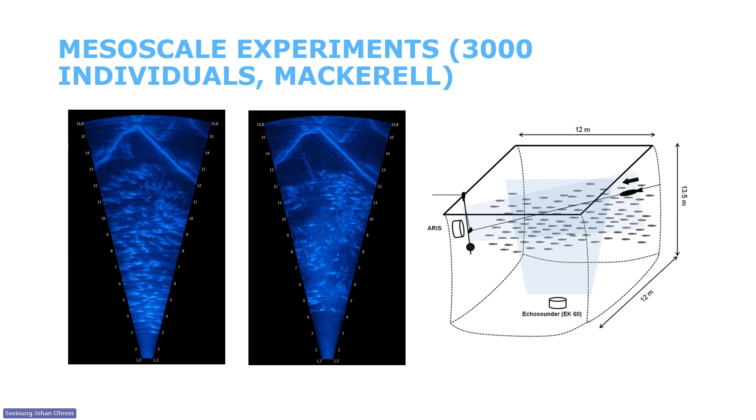And what we actually understood in the end is that some of the cues which are really significant in the lab environment are not significant when you scale it up. And we don't know exactly the reason why. For example, they didn't have any tendency to react to the tail motion or the hydrodynamic signals from a tail. And I think it's for the same reason as here. There's a lot of noise here, so you have a hard time hearing me speak, right? So now think you're one of those mackerels out of 3,000, and you have to pick up the cues from something that is going through the net. So what are you relying on? The only things you can rely on are very, very rudimentary, very primitive things.

And it's probably the speed and the size that comes out from my research. And it kind of makes sense because mackerel, it's a predator, it's a pelagic fish. It's normally not kept in fish bins, but this one was because of the experimentation. But the only natural enemies of those fish are actually orca whales. And when they're gliding in, okay, what are you afraid of? Speed and size, right? So you better take off before something happens. And it kind of makes sense that a fish reacts in this way.

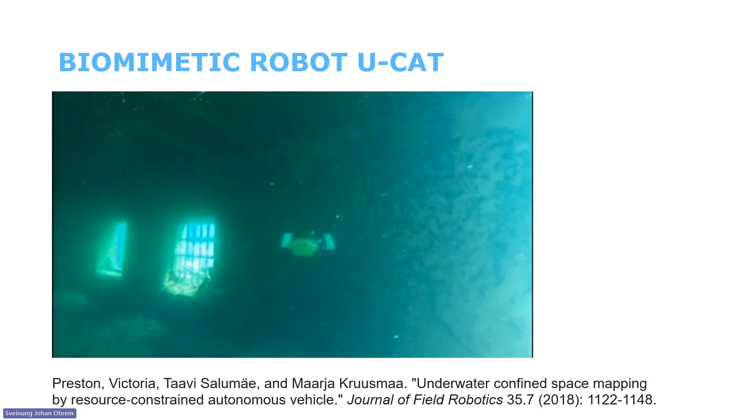And from there we also got an idea to use one of our robots that was developed for a completely different reason. We first developed it for underwater archaeology. And it's a fin-propelled robot for a reason, because we wanted to have something that is very quiet and very maneuverable. This one was specifically, as you can see, developed for shipwreck penetration. So we wanted to have something that is small, goes into a confined place, turns around easily, and doesn't disturb the water because it stirs up the sediments and you can't see anything.

But we thought that once we have this robot already, it could have those features that are interesting for observing fishes and fish farms because it's small, it moves quietly, it's maneuverable, all those things that you need in a fish farm. So we went on and we wanted to see if it's really an advantage to have this sort of a bio-inspired robot in a fish farm. And we made a well controlled experiment, as you can see, in a mesoscale environment to compare it to two different intervention technologies.

One of them is a human diver, which you heard about already. It's still the most used technology in a fish farm for inspection and maintenance. And another is the ROV, which is also quite often used for maintenance in fish farms. And in addition to that, we also refined the experiments with the bio-inspired robots. So we had different parameters that we controlled. We wanted to know whether there is a reaction to a color. We wanted to know whether there is a reaction to actuation mode, and when it's completely quiet.

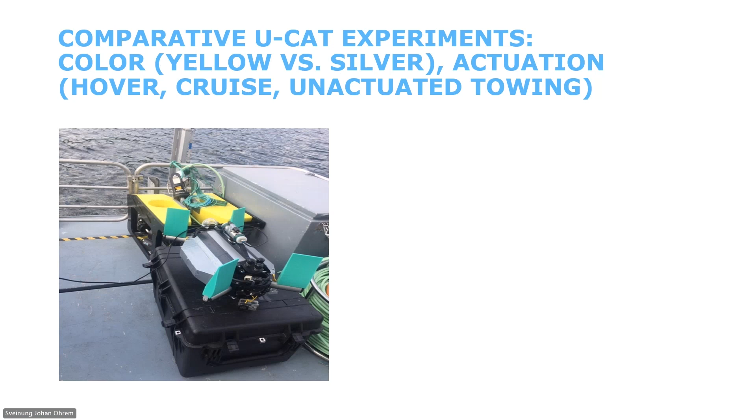And from there on, we designed the experiments as well as you can do in the mesoscale. So having a camera looking upward and then having the device for a diver, which is also equipped with a GoPro, taking videos, and then comparing these situations to each other. So from this video, you could see that the little robot actually has two different modes. One is a hovering mode, so it can do very fine-grained motion, for example, station keeping. And the other mode of locomotion is a cruising mode, which goes a little bit faster. And you could also see the relative size of the two robots.

And here you can see the picture from a camera looking up from the bottom. Here you see the diver, and you see no fish around it because the fish have taken off. They didn't like the diver. And you could see Argus Mini, and here you can also see the U-CAT robot. From there, you could already say the fish come closer to the U-CAT robot, but we also wanted to quantify it. So from these pictures, we measured how close the fish get, and from a GoPro, we were also measuring the tailbeat frequency of the fish because we took it as a proxy of how disturbed fish are if they are in a natural environment where

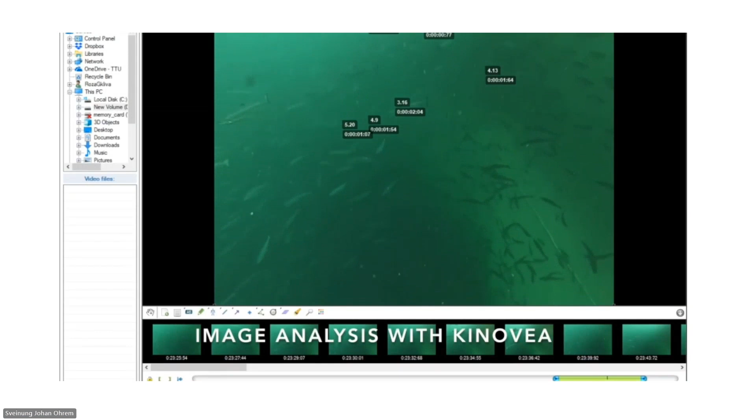Oh yeah, that was actually from my video. I'm coming back to that sound.

And making a comparison between those technologies. Then, the main finding was actually something that was quite consistent with our previous experiment in the mackerel farm, saying that the size really matters.

If you're really, really big, then probably the fish is going to be afraid of you. And for some reason, the fish were much more showing the flee behavior for a human diver. So they're getting far, far away from the human diver, but we couldn't figure out for what reason. Was it the size? Was it the shape of the diver? Or was it the color of the diver? Or was it the rebreather? Or bubbles or something else, but they were really, really going away from the diver.

And it definitely said that if you want to observe fish in their natural environment, you shouldn't dive into the net and go see if you can see all the subdominant fish somewhere who are undernourished or something. They probably have gone away long before you go into the net. It's a little bit better with the mini Argus. And with a small robot, it's really best. So they're quite relaxed around that.

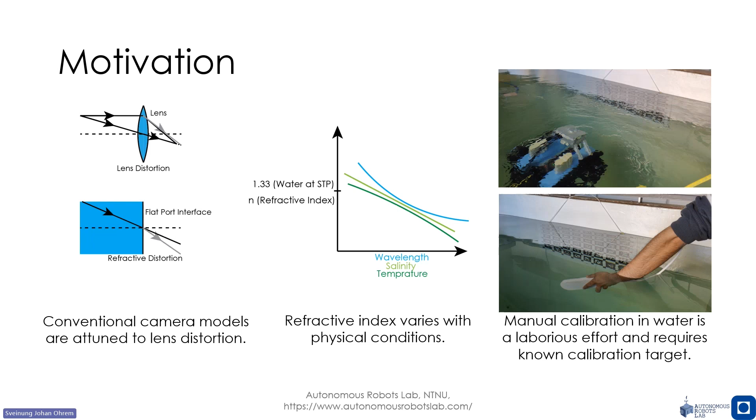Now, of course, the motivation here is that when people do calibration underwater, they try to use tools which are attuned to lens distortion. However, this does not account for the refractive distortion of water. And also, if you just calibrate your camera in one particular setting, the refractive index itself can change due to many properties of water. And also, calibration in water is very laborious. So you have to move your robot around, or you have to take your camera and move it around by hand. What we propose here is basically a camera model which integrates the refractive index in the model itself.

And going forward, at the root of this concept is basically that when you have refraction and distortion due to refraction, what you essentially have is warping in the form of a hyperbola. And this hyperbola is parameterized by refractive index. Now, if you can make this hyperbolic line a straight line, then you have corrected for refractive index. And that's how we estimate the refractive index itself. A little bit of maths here, but the whole idea is that we can choose the features between the stereo images. And given those features, we can estimate the refractive index for each of these features. We do some filtering, and we take the mean over the image, over each of the pixels which we match. And this allows us to estimate the refractive index and use the refractive camera model to calibrate the image and remove the distortion.

Now, for experiments, what we do is we have an underwater robot. It is mainly, again, a vision-based robot with 5 cameras on the top. So you see 2 cameras, a stereo pair, which is the 2 cameras in front, camera 1, camera 2. And then there are side cameras, and then there's one top camera. Of course, the robot also has an IMU.

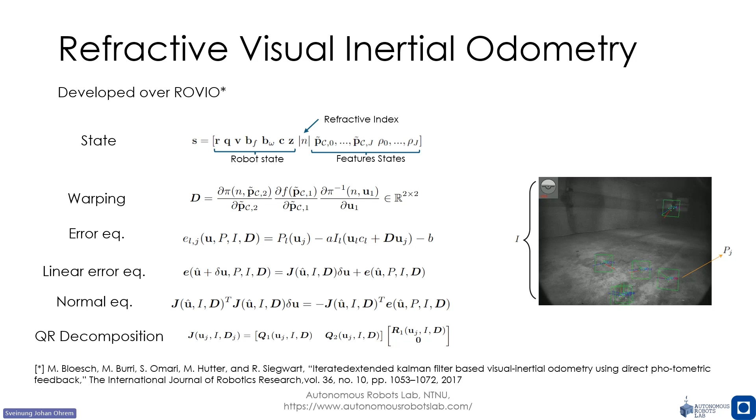So we have the robot state, which is the position, velocity, angular velocity, orientation, etc. Then we have the refractive index in the state of the Kalman filter. And then we have state related to the features which we are tracking. Now, we of course need to derive some quantities for the refractive index and how these quantities are changed in the framework of the visual inertial odometry, but not going too much in the maths. The main idea is that we rederive the innovation term of the filter and rederive the Jacobians, and that allows us to estimate the refractive index.

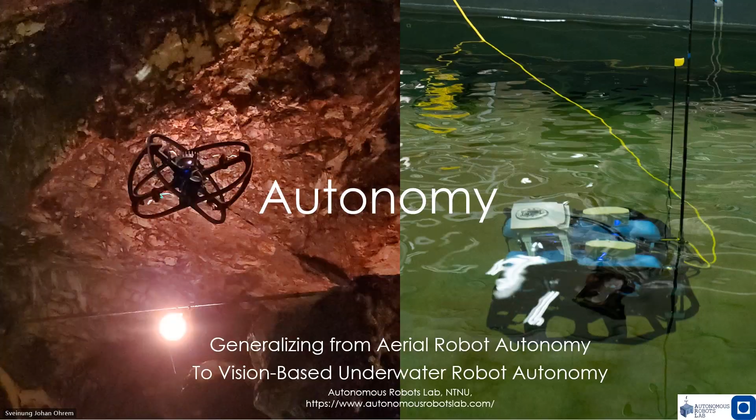What we are showing here is an aerial robot with a learning-based method. It takes the depth image from the depth camera as input, takes partial state, and tries to avoid the obstacles around it and go to the goal. Can we do the same for an underwater robot? We can, given reliable state estimation. This is a simplistic environment, but it allows us to do state estimation. Then we do depth estimation, and given both, we can use the previous learning-based planner to do learning-based path planning underwater. These pillars or columns are the obstacles.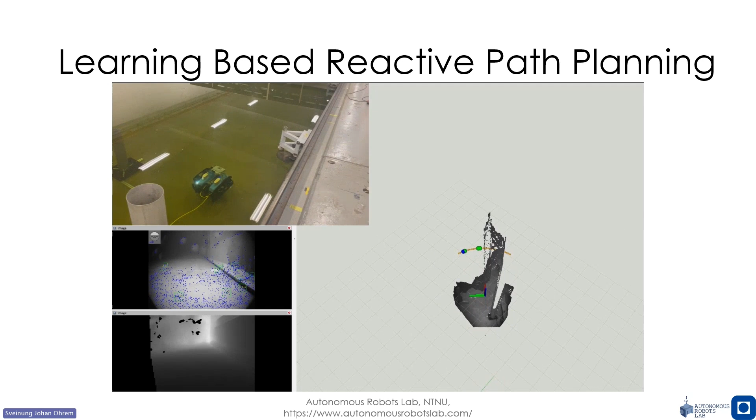Another method developed in the lab which has received quite some attention in the past few years is the graph-based exploration path planner, or GBPlanner in short. It has been an essential part of the lab's solution in the DARPA SubT Challenge, which the lab won. This path planner is for exploration, to explore the environment, and we deploy it on an underwater robot as well.

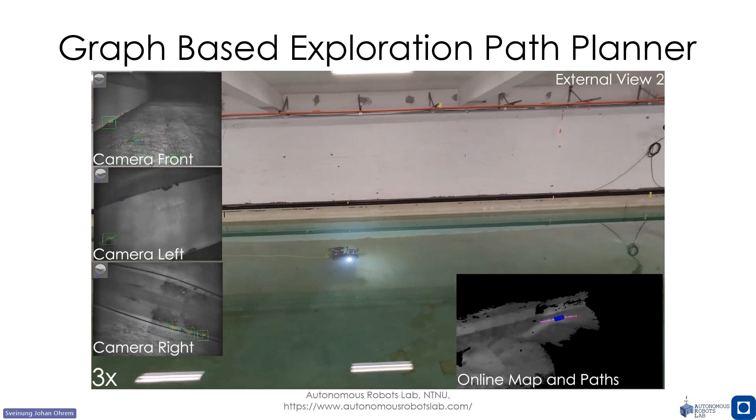What you see here is this ROV taking all its 3 cameras, 1 in the front and 2 on the side, doing the state estimation, making the point cloud, and exploring the environment completely autonomously. You can see the paths generated by the planner, which allow it to completely autonomously explore the pool.

Now, since the workshop is about aquaculture, I'll quickly go over results from something we did very recently in a fish farm. The main mission here was to collect data, and then we ran some of our methods on the data. Here we have the robot in the fish farm, and we are able to run the state estimation on the fishnet. One challenge with the fishnet, even if it is visible, is that it is a very self-similar environment.

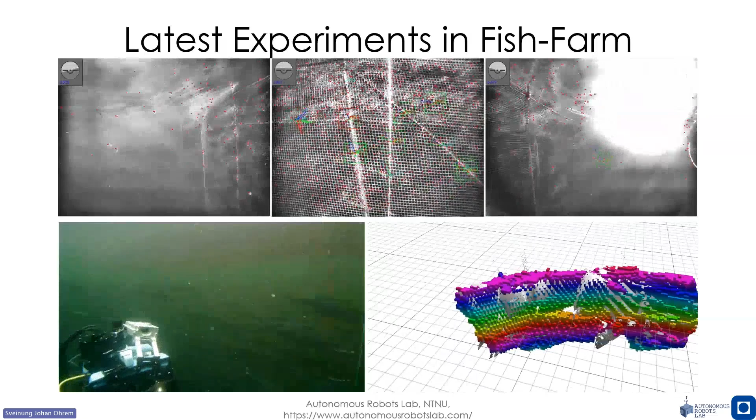But that is mitigated by the visual inertial estimation method which we are using, which is based on ROVIO. So it does IMU-based prediction, and that allows it to not be reliant on the distinctness of the features. But anyhow, we are able to map the environment, so you can see the curve of the fish farm. And of course, there's a lot of fish in the fish farm, which can be a problem to the robot, but mostly it is very robust and is able to navigate even if some of the fish comes in front of the robot.

Now, our goal in the very near future would be to enable autonomy in such conditions and to go more for the low light conditions as well, and preferably in environments which have sparse visual clues. So, for example, the robot can handle some visual degradation from time to time.

And that being said, that's the end of the presentation. Thank you so much.

Thank you very much. And I'm sorry that you got quite much competition on the sound, although it's nice. So we're just going on. I've got to say, Mohit, that I think you're onto something with your methods.

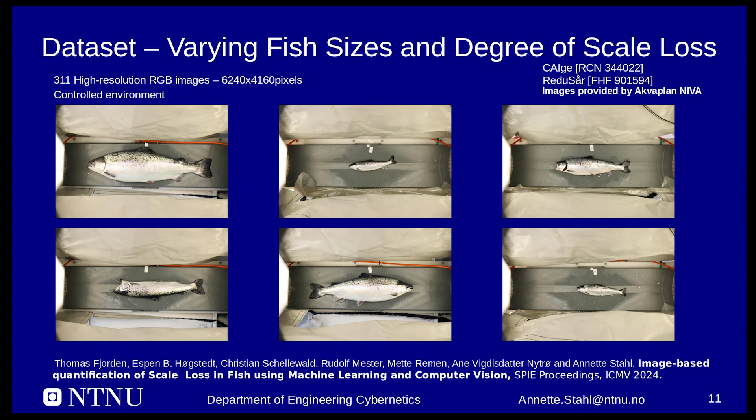For the analysis, we utilized a dataset of around 300 images, which were recorded under controlled environments in a lab. The dataset contained varying fish sizes and degrees of scale loss. YOLOv8 was utilized to detect the fish and segment it into scale loss regions. It derives, in addition, also a skin mask. Both the scale loss detections are weighted against the skin mask regions in order to derive a quantification measurement.

With this particular method, we've received a precision score of 89.4% and a recall score of 79.8%.

But does this proposed method also work for underwater images, which show a huge difference in appearance to the training data set? Here you see a first proof of concept study and the results received by using very few images. And we received with that a precision score of 64.4% and a recall of 58.8%, which is a quite good result for this very, very small data set we used for the training.

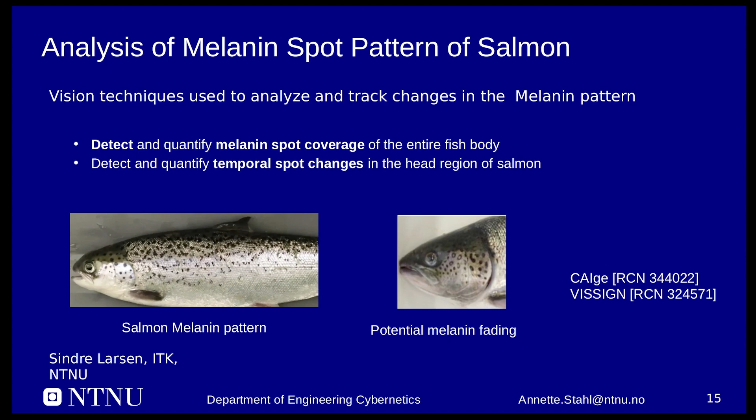Another aspect of our research focuses on melanin spot patterns. By tracking these patterns, we can detect and quantify stress and disease indicators, advancing our capability to monitor health without direct contact. The melanin spot coverage of the entire fish body is detected, and spot changes in the head region of the salmon are also tracked over time.

The potential fading of the melanin spots might indicate severe levels of stress. And with machine learning technologies, these changes could be monitored over time, similar to the previous method we presented. The melanin spot pattern also allows for advancing towards individual fish re-identification to create unique fish profiles based on spot patterns. This technique is vital for tracking the long-term health and growth of individual salmon within larger populations.

This leads us to the very difficult task of long-term fish re-identification. The vast number of fish and the subsea conditions pose a significant identification challenge. By facilitating a biometric fingerprint for each salmon, enabling individual tracking and re-identification over time, we're getting closer to personalized health management. The question here is then, can we re-identify an individual among so many individuals?

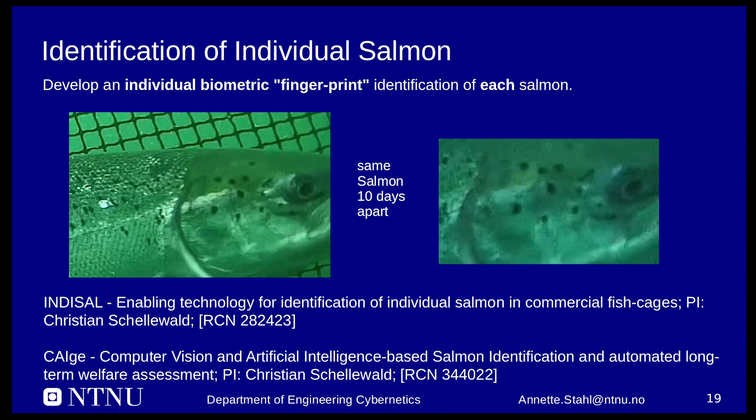To get an impression, here you see the salmon with a time difference of 10 days. So the same salmon is recorded and you can maybe observe the same pattern at the head region shown here in the video. With this technology, we developed an automated breathing rate respiration estimation system called SAPRE system. This system allows us to observe and react to subtle changes in individual behavior that indicate health issues or stress.

We observed different breathing behaviors during 24 hours. During the different oxygen levels, there were the same slow and fast breathers, indicating different personalities. We were able to reliably identify salmon in a population of 63 fish. The mouth opening frequency was monitored, and lower oxygen levels in the tank did lead to an increased breathing rate.

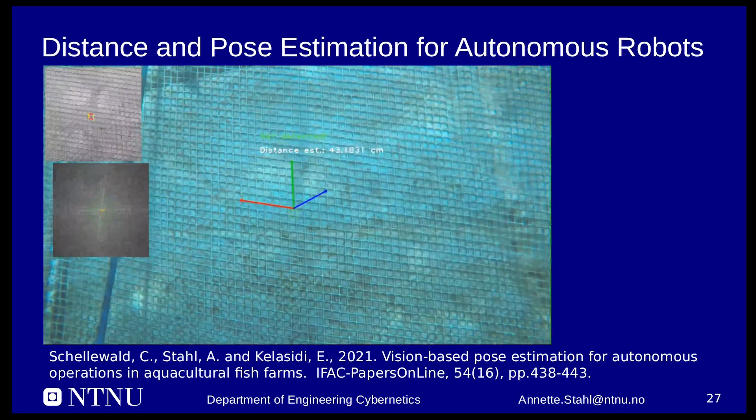With that, I would like to conclude my talk and thank our collaborators at SINTEF, NTNU and NMBU. The presented research was mostly connected to the CAIge project, which is funded by the Research Council of Norway. And I would like to mention that the CAIge project was recently selected to be part of a larger initiative endorsed by the United Nations Decade of Ocean Science for Sustainable Development.

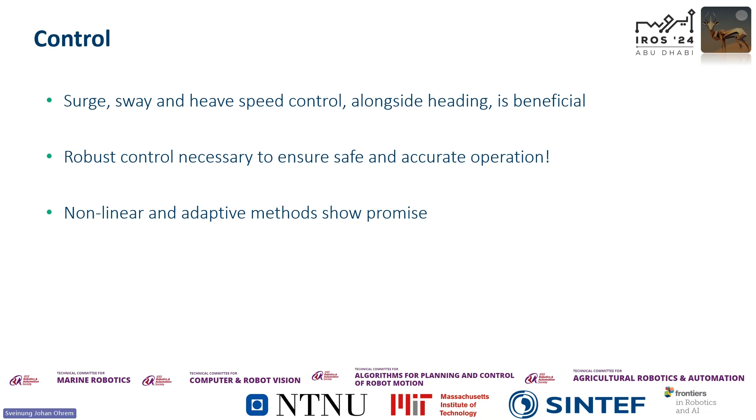As for future work, when it comes to navigation, cost is the essential keyword. The aforementioned technologies all cost more than the robots themselves, so they're not necessarily available to many of the companies offering these services. So camera-based navigation is, of course, an immediate opportunity, but there is still a way to go to make these systems available to the industry. For guidance and control, there is a need for long-term, larger scale trials to prove that these methods are actually as robust as they claim to be, because currently only short tests have been done.

And lastly, more vehicle-manipulator control, which could enable the ROVs to do more than just inspect, to actually repair and maintain the equipment, is also something to work towards in the future. Thank you for your attention.

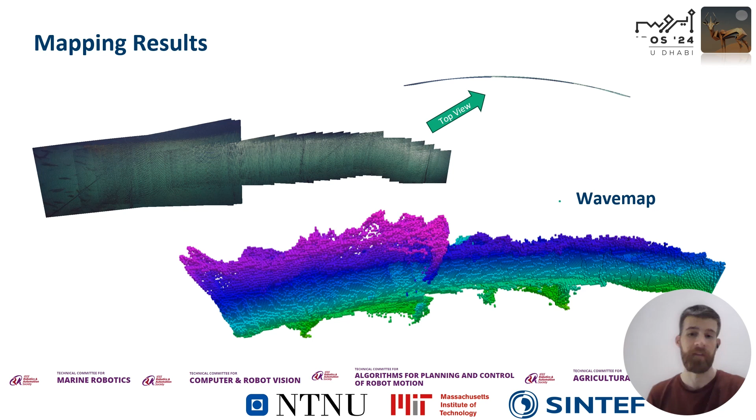As a conclusion, our results show the possibilities of integrating FFT, TrueDepth, and WaveMap method for underwater and fish farming applications. But we also showed the potential of future development of the combination of those three methods.

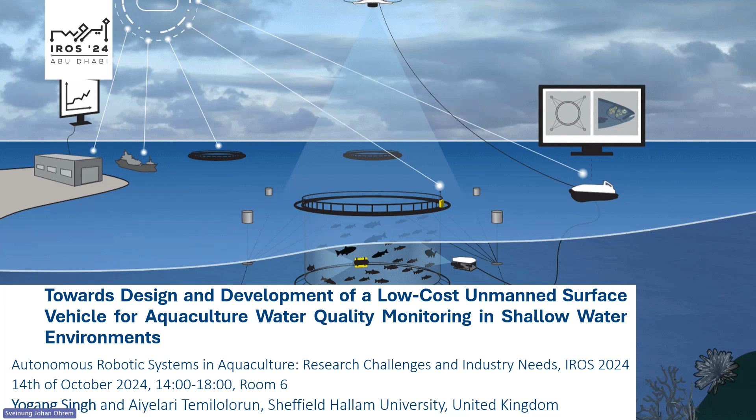The challenge in the aquaculture industry is that it grew in the last 5 years to 189 million metric tons. Out of that, 89 million metric tons come from developing nations, because of the requirements of the local industry. The local industry in these developing regions has two major issues: one is labor shortage, and another is the cost of operations. So shallow water environments become a major issue when operating in these developing regions.

Therefore, the need comes up for cost-effective, easy-to-deploy, agile robotic solutions. Mobility in these constrained environments is another challenge. So we need to develop a low-cost USV which can be effective for water quality monitoring in shallow water environments, because water quality is a major aspect of the aquaculture industry due to its impact on the health of the environment and the species there.

So our design is very simple, very basic robotics we came up with. We 3D print all our parts in the lab itself, bring those parts together by making use of epoxy resins and PLA filaments, along with carbon fiber rods to connect and create a hull model. We designed two platforms, but our presentation is only presenting one, where one of them is a hovercraft style and the other is an underwater style.

Overall, the platform is 5 kgs in weight, smaller in size, easy to deploy, and smaller in speed. The maximum speed goes up to 5 meters per second. Hardware design: for high-level control we are making use of ROS Ubuntu systems, and at the low-level control, very traditional Arduino platforms. Our ROS architecture comprises ROS files and launch files, along with the connections and their subsequent interactions, for which we are making use of Wi-Fi and 4G technologies.

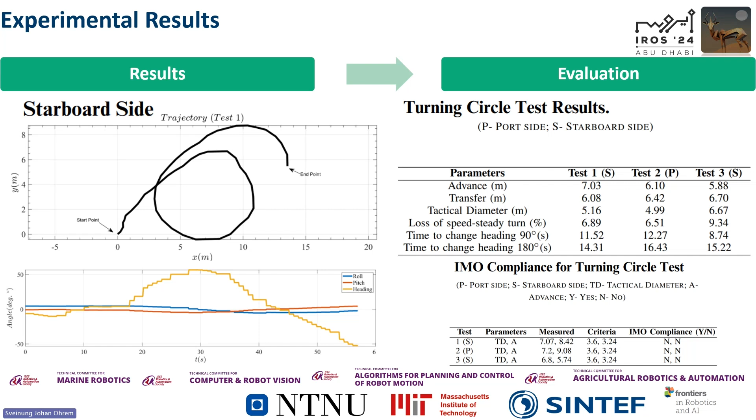In November, we are presenting another work related to our vessel maneuvering at an international ship conference, where we are going to present some iterative work on these. So that sums up our results. This is our USV in motion, and what we are trying to show here is one of the test results for these maneuvering simulations. Very easy to deploy, remotely controlled, and we are doing it in one of the reservoirs in Sheffield in the United Kingdom. Thank you so much for listening to us.

Thank you so much. Are we trying? Trying one more time. One more time. We're trying. And after that, it's Helene's show.

Hey everyone, we are from the University of Maryland, and today we will be presenting our work on 3D water quality mapping using an invariant extended Kalman filter for underwater robot localization. Diving right into it, there are some challenges with traditional water quality mapping methods. The first is a boat, where you don't have a lot of depth variability since you can't lower the sensor beyond a certain depth. The second is human divers, which are slow, and you have limited time depending on your scuba tanks. Our method tries to counter these points by doing water quality mapping using a robot.

The only challenge here is underwater 3D localization, as you can see on the right. Since we operate in aquaculture environments, the turbidity is very high due to shallow water, and this leads to vision-based SLAM methods not being very robust. To counter this, we need a method to have an intermediate pose estimate between two good vision-based SLAM readings, and that's why we take advantage of the invariant extended Kalman filter, a modified version of the EKF, which is robust to sensor noise and provides the major contribution of being a model-free approach to handle our nonlinear dynamics. We use the IMU readings as inputs and the AHRS and DVL readings to correct the estimate. Our pose is initialized using a GPS reading.

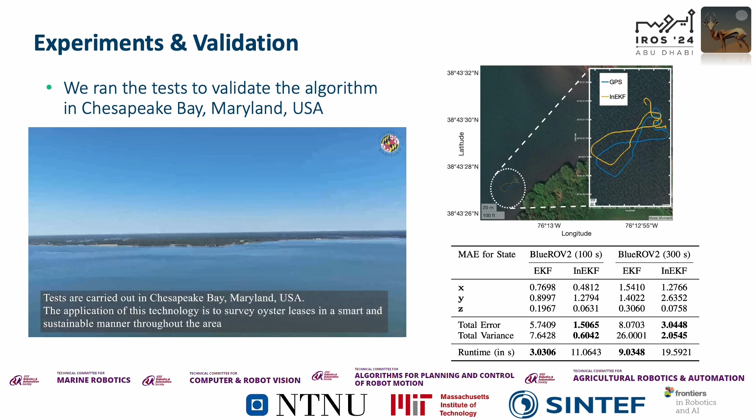So we tested out this method in the Chesapeake Bay in Maryland. And we noticed that when we compare it against the GPS reading for ground reference after surface tracing, we had an error of 1.5 meters for a 100-second run and around 3 meters for a 300-second run. The variance was pretty low as well, which showed us that this is good for us in an intermediate scenario if we want to look at it for even 10 or 20 seconds or even a long-term vision occlusion.

Hence, we could use this for a water quality analysis, which we compared against the EXO water quality sensor that we have, and we plotted the readings with depth variability for temperature, TDS, salinity, pH, chlorophyll, TSS, all of it. And we could notice good results with it, which gave us results for a variable depth analysis of water quality.

So for future work, we can have a more hybrid estimation approach combining optimization as well as a filter to get an accurate but fast method, and then combine this with vision with SLAM methods and see how well it works. Then we want to look into real-time integration with the sensor so that we can have an autonomous navigation methodology to move towards more specific parameter values in the water.